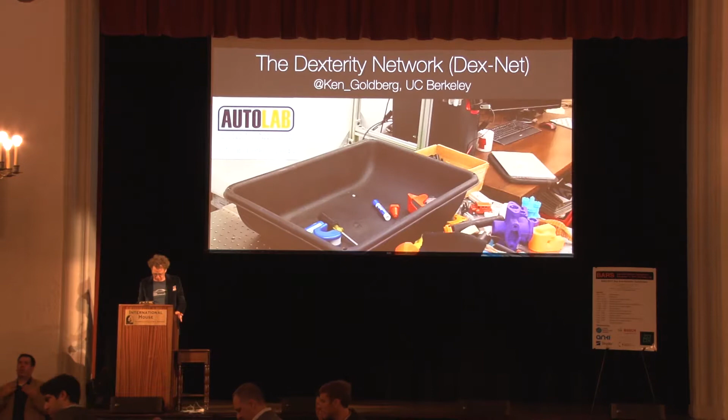This is the issue I've been thinking about lately, which is e-commerce. This has really taken off in the last couple of years. We now have an unprecedented amount of packages being delivered. I think Amazon's up to 500 per second.

The challenge is, how do you actually get these objects delivered? If you look at a typical Amazon warehouse, it's kind of like a hoarder's worst nightmare. They don't organize things nicely by category. They just throw everything into the next available slot, and then they have this challenge: somebody puts in an order for a box of Alka-Seltzer and a copy of Plato's Republic, and you have to somehow figure out where these two things are, put them together, and get them out the door. Right now it takes about a day or two.

What they'd really like to do is get this down, and the faster they can make it, they believe, if they can get it down to even a matter of hours, then the demand will go up. So this problem is just going to exaggerate over the next couple of years. This is the particular area I think we can make some progress in, which is the picking and the packing.

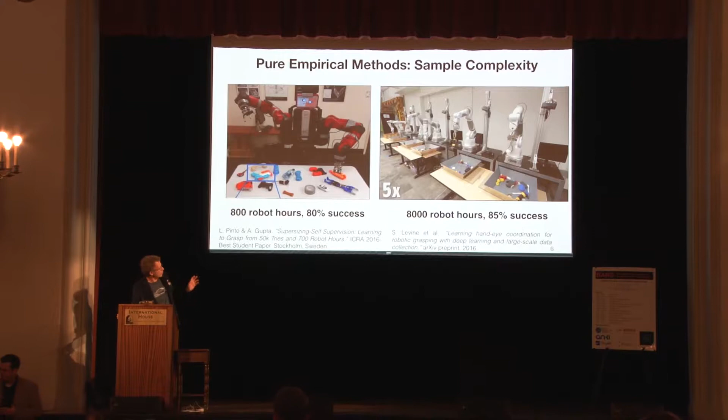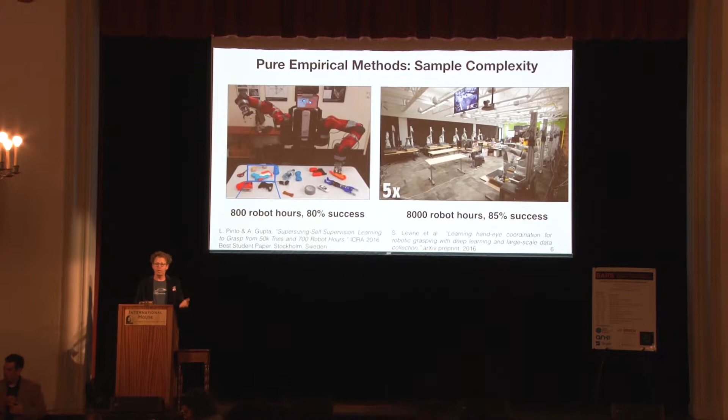We have seen some very exciting developments in what I would call purely empirical methods that take an ab initio approach. They just essentially sample lots of grasps and then do a form of reinforcement learning over time, and you're getting very interesting results. But the thing to notice here is the asymptote. It seems that as we increase the numbers, the sample complexity is of a concern, because we want to be able to get up to 90, 95, 99%, 99.9% for industry to accept this, to adopt it.

Now, one thing we all know is that we've had this huge success in computer vision as a result of ImageNet. ImageNet was basically the collection of millions, tens of millions of labeled images, and that enabled, once you got to a critical mass, some scaling effects to occur. We started being able to learn structure that was inherent to the images and generalize beyond the training set.

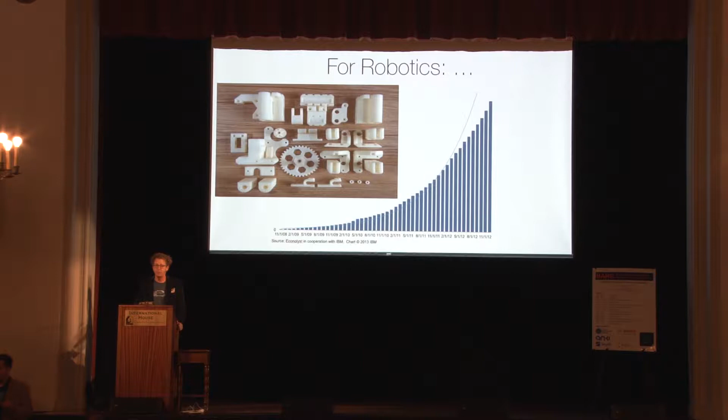So I'm curious if we could do something like that for robotics. In other words, can we also generate a labeled data set? For robotics, what we want is three-dimensional models, and the labels in this case would be grasp configurations for these three-dimensional models. The nice thing is that today, because of 3D printing, we have a proliferation of 3D models available. So I think this is achievable.

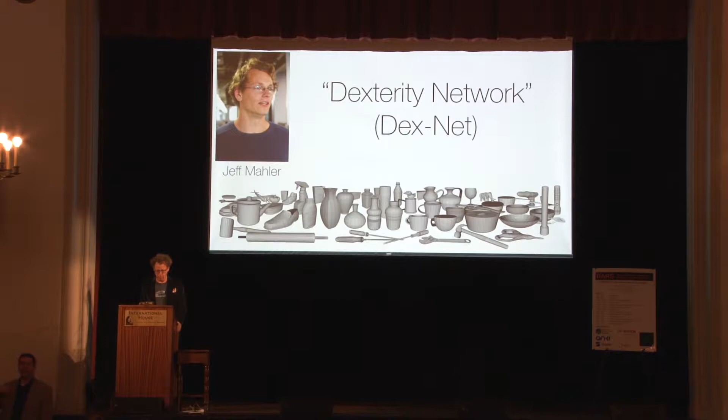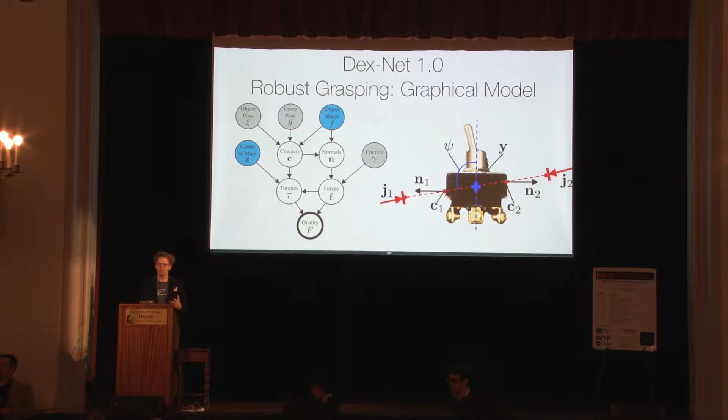This is really the thought behind what we call the Dexterity Network, and I want to give full credit to Jeff Mahler—this is his PhD thesis. Now a number of other PhD students are involved in it. The first version of Dex-Net was in collaboration with Google. We basically set up a graphical model to characterize all the sources of uncertainty, and there are many, because you can't sense things precisely, you can't control things precisely, and there's inherent uncertainty in the shape and properties like friction.

So what we do is this: we take an object, say this red object here, and we're going to consider many different grasps of that object. For each grasp, we're going to consider perturbations, because we want to be robust—we're looking for grasps that are robust to these inherent uncertainties. So what we're doing there is tweaking, moving the object.

We're sampling from the distributions to estimate and evaluate each of the perturbed grasps, which allows us to find grasps that are better than others. You can see the grasp on the right is more robust than the grasp on the left, and we can formalize that using Monte Carlo integration.

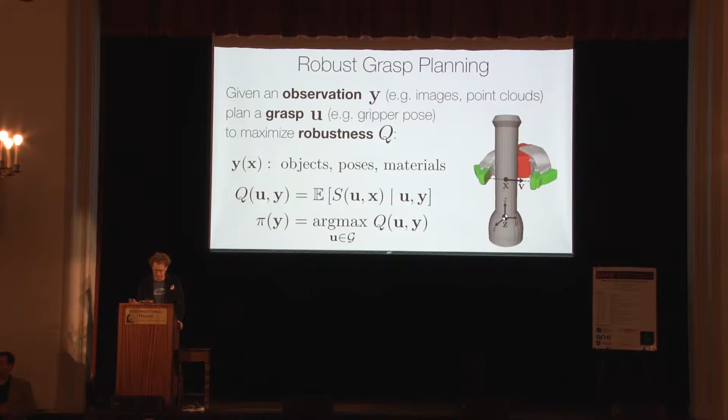We're sampling from these distributions to estimate a quality measure, which is the expected probability of success. We want to optimize that and find the grasp that maximizes the probability of success.

There's some combinatorics to pulling this off, because you have to do this for every grasp on the object, with about 1,000 perturbations per grasp, and for maybe 10,000 objects in your data set, this becomes a fairly daunting computation.

So some things we can do: we can make use of the cloud, working with Google's cloud clusters. We also leverage similarity—once we've computed estimates for one object, we can transfer that to other objects using multi-arm bandits, which has come up several times today.

We need a similarity measure, and this is where deep learning comes in, because we can use multi-view convolutional neural nets to find similar objects for a new object we encounter. Then we use a continuous correlated beta process to model the probability of grasp success, using the success of similar objects as priors.

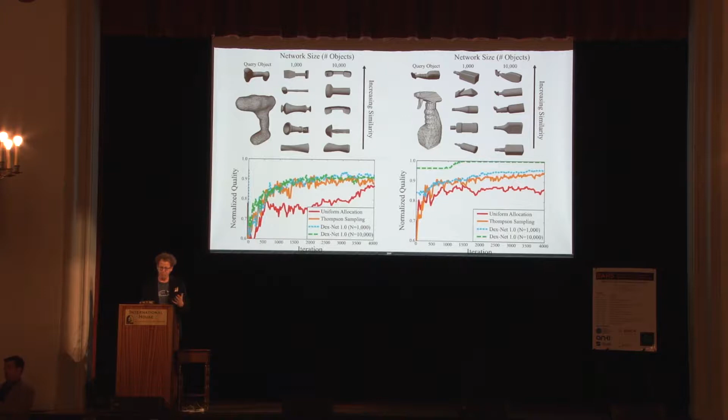We've been able to verify that this does work, and we get scaling effects as we grow the size of the data set. So this is the idea: we want to grow this set, this dexterity network, and have all these objects linked by how similar they are.

We're also very interested in adversarial objects. So we've been seeking adversarial objects, just as computer vision has been looking at adversarial images, and we're downloading these images and objects and then 3D printing them for experiments.

Now, we ran some experiments. They look like this, and here's the result: we got about 83% success. This is after we've trained it—using this technique, we've done all this stochastic optimization and got to about 83%. That's not very good, and it's because of uncertainty in the sensing and the control.

So this is what we call DexNet 1.0. Here's the block diagram of this system. Now, Jeff's idea was to remove two components, to go directly from point clouds to grasps. This is a pretty big stretch—I actually have to say, I was not convinced this was going to work.

But here's the idea: we render point clouds synthetically with noise, and as ground truth we use DexNet 1.0, because we know the probability of success for those grasps. Then we have a very large data set of grasps to use—in this case, about 7 million grasp examples.

We feed that in to train a convolutional neural network to estimate, from a point cloud and a particular grasp, what the robustness of that grasp is. We use that to find robust grasps directly from point clouds, and this has been working much better—we're getting up to 94% success.

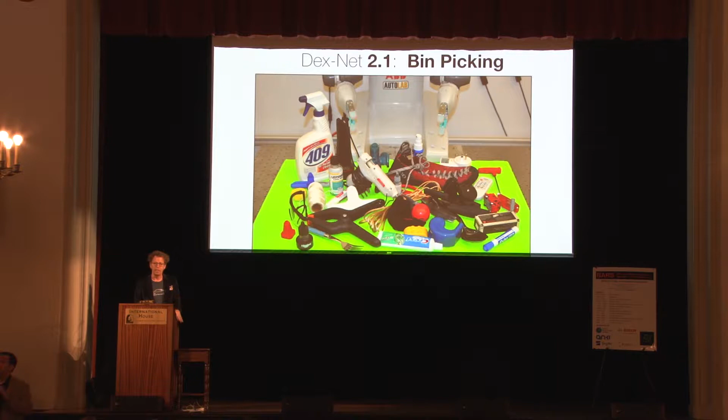Again, this isn't empirical learning—there's no reinforcement learning, it's doing this directly from analysis. Now, up to this point, everything was with objects in isolation. So during the spring, we started looking at objects in clutter, in bins, essentially.

Now we take this idea a step further: we actually sample synthetic heaps of objects. We use PyBullet to simulate dropping parts down, then generate point clouds from those. We again have ground truth from DexNet 2.0, and use that to come up with a training set for what we call DexNet 2.1.

Here the success rate is 89%. Again, not where we want it to be, but it's showing promise that we're able to routinely clear bins of 10 or 15 objects with this system. The nice thing about grasping, by the way, is that if you fail, you just get to retry, which isn't necessarily the case in autonomous driving.

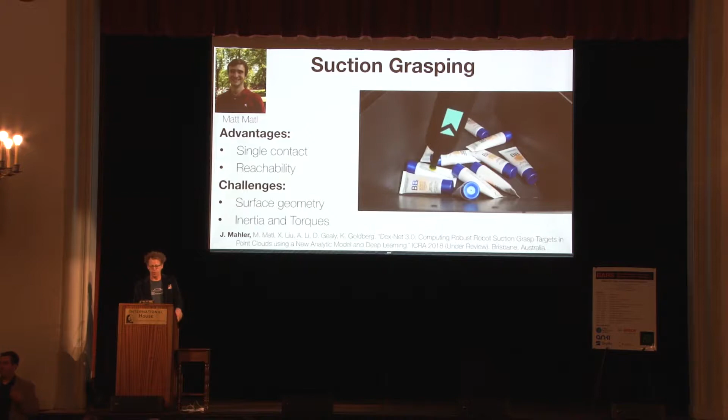So this is where we are, this is the plot. Now, the last thing I want to mention is what we're working on right now, and I'm very excited about it. You'll hear there's a poster today - Matt Matl is focusing on this, which is suction grasping.

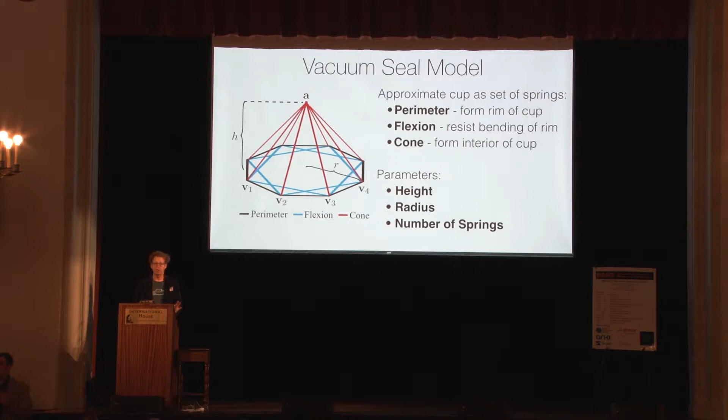Many people in industry use suction cups, so we want to apply the same methodology to suction grasping. We can generate a graphical model, come up with a seal model for the suction cup, and check if a suction cup seal will be good for a given target location. We can also do a wrench space analysis based on forces and torques.

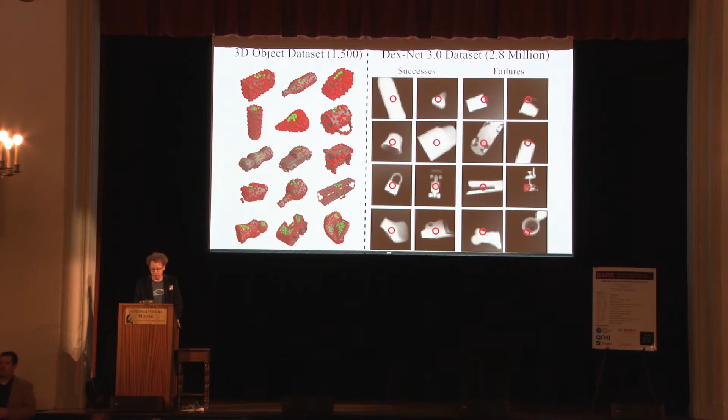Then we can generate robust grasps, very analogous to what we did before, and build this data set. We can do experiments - we're getting 81% on the adversarial objects, but on the typical, what we call basic objects down here on the lower right, we're getting 98% success. So we're very excited about this.

The next thing we're going to do is start looking at combinations, or working with companies on what we call composite policies, where we're putting together both suction and grasping. That will be our work in the next few years, or the next few months.

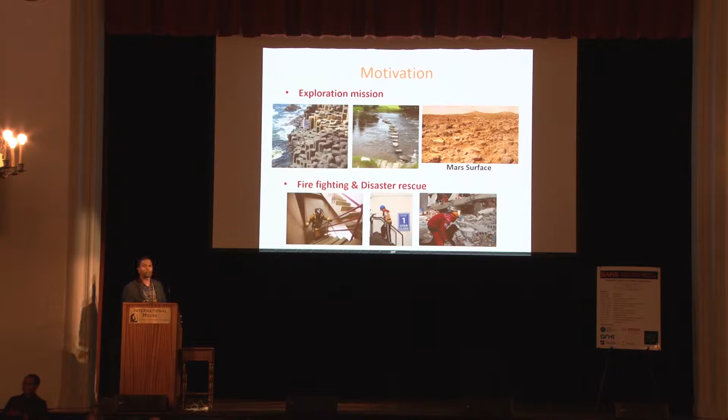Just to give you some motivation, every single scenario that you see that cannot be navigated by wheeled robots, legged robots can navigate. People are motivated to work on legged robots because of this, but we don't have the control approaches to navigate this terrain. I'm going to show you one control approach towards this.

So here's a kid doing the stepping stone problem. Now, I'm not evil - the kid actually nails the stepping stone on the last step. What he fails to account for are the contact forces, so he fails, he slips, and he falls.

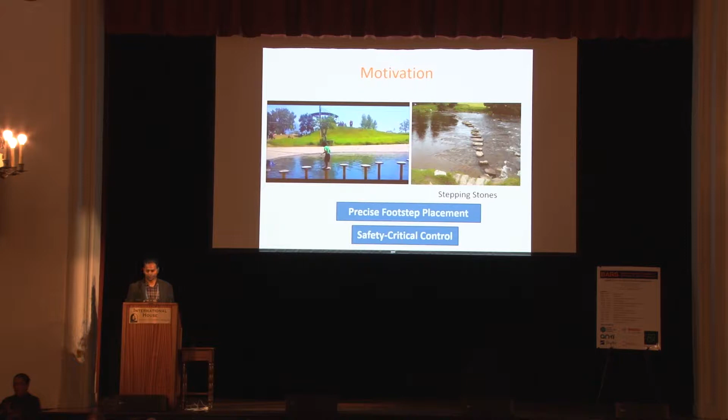So if you want to design controllers, you not only have to take the constraints of the stepping stones into account, but you also have to take the friction constraints into account. If you do things right, this is what you get. So I'm going to talk about the control approaches behind this.

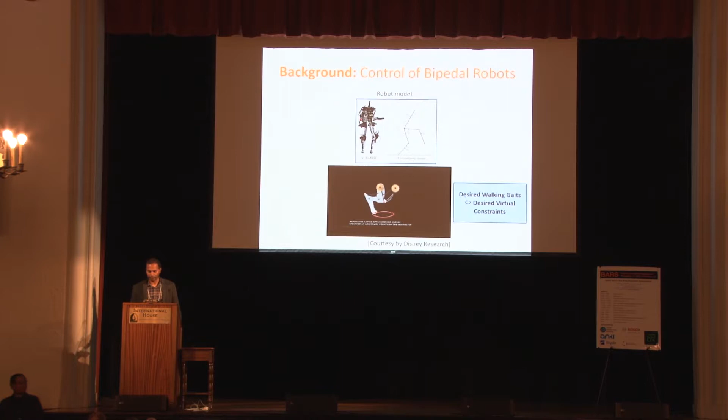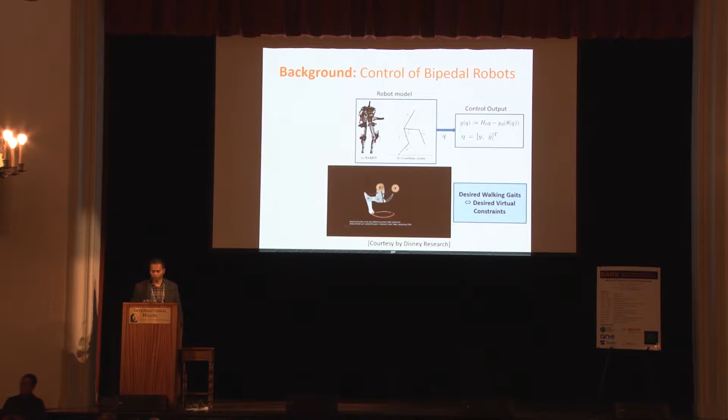Just to give you a quick background: for legged locomotion, you have a set of flat outputs - a set of outputs that you want to drive to zero. So you design a controller to drive Y to 0. One way to do this is to do input-output linearization.

So you create an exact linear system using feedback linearization, and then you can do your favorite controller on this linear system. This could be as simple as PD. But once you realize that you can do PD, you can do something even more advanced.

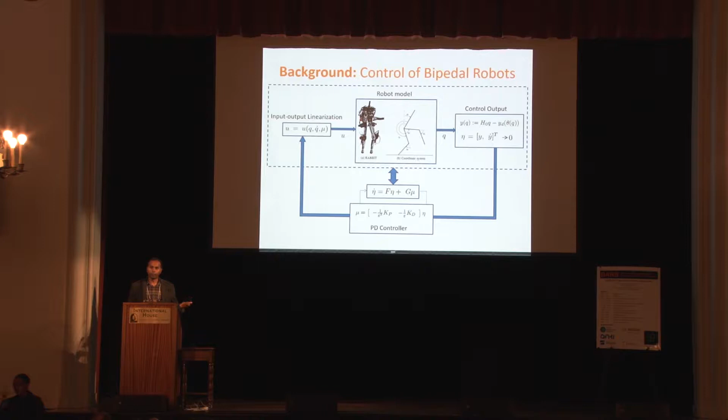Now, thanks to Slotine's talk, I can now talk about control Lyapunov functions. So instead of doing PD control, you can express a control Lyapunov function and enforce this constraint using the controller, so V dot depends on the control input. If you do this, your outputs go down to 0 exponentially.

This can be expressed as a single quadratic program that's solved pointwise in time, and QPs are really quick to solve. Once you have a QP, you can incorporate constraints such as input constraints, torque constraints, friction constraints, and so on.

So let's move to the safety critical problem. You want to move your swing foot and land on this - you make a single mistake, your whole system fails. This is sort of like autonomous driving without the lane markers and so on.

So the key here is control barrier functions, and it's very similar to control Lyapunov functions. You want to enforce the constraint of B being always greater than 0. Instead of enforcing this constraint directly, you look at the time derivative of B, which depends on the control input, and you enforce this constraint.

It's very similar to the CLF constraint. If you do this, now your state evolves in this green region, which indirectly satisfies B greater than 0. So you put this together, you have a single quadratic program that can enforce stability, safety, and other constraints.

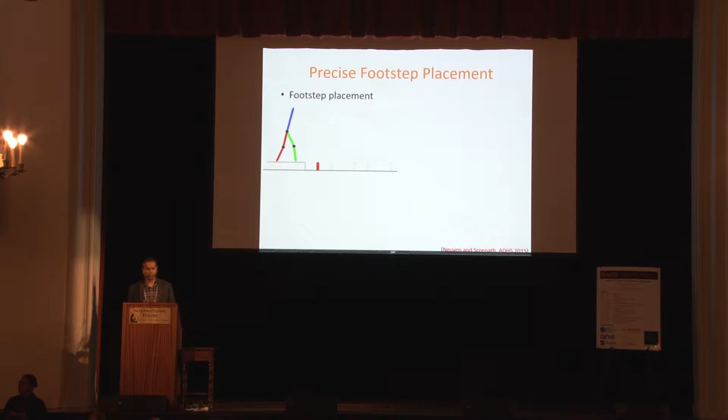The foot placement constraint can also be enforced through barriers. So you can construct a barrier such that your swing foot is inside this big circle and outside this little circle to guarantee your end time constraint.

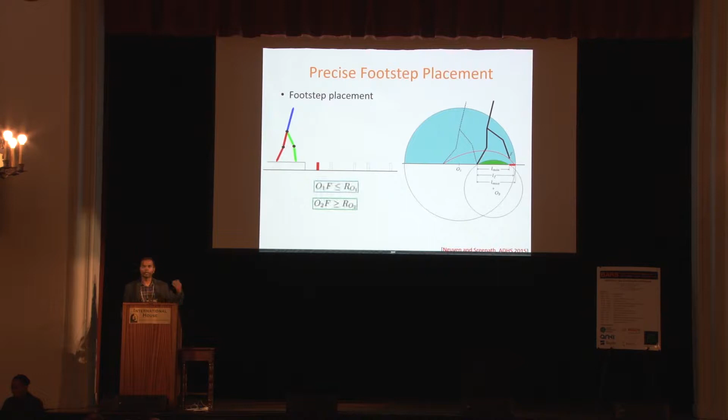Now here is a simulation. You have information of this terrain one step ahead. You don't have sufficient time to do planning on the fly, so your controller is moving your periodic orbit slightly so that you're guaranteed to have a foot contact on the next stepping stone. This is a simple model of Rabbit.

It can be applied to more complex systems. This is DURUS, 20 degrees of freedom. Here, not only the step length, but the step width also changes. You can also do step length and step height.

This is a model of ATRIAS. So this is really complex terrain. We have knowledge of the terrain only one step ahead, so you don't have the entire terrain. So you can do worst case where the step length and the step height changes, and all of these nice, interesting animations.

But everything works in animation and simulations, but here's an experiment. This is ATRIAS walking on cinder blocks where the step lengths are stochastically changing. Now some graduate student has measured all these stepping stones accurately and is giving that information to the controller one step ahead. But also the robot places its foot at some particular point, and so it has to do some dead reckoning based on onboard sensors to correct for this.

So here's where you have step height and step length changes. There was a recent video that came out from Boston Dynamics a couple of days ago. If you've seen that, they're doing stepping stones. This is our first approach for walking on stepping stones.

Now, if you want to use perception, this is what the robot sees. You cannot really see where you're stepping. You can only see a couple of steps ahead. So we're trying to put a camera on this. Some preliminary approaches towards this: simple depth segmentation can get you walking on the stepping stones.

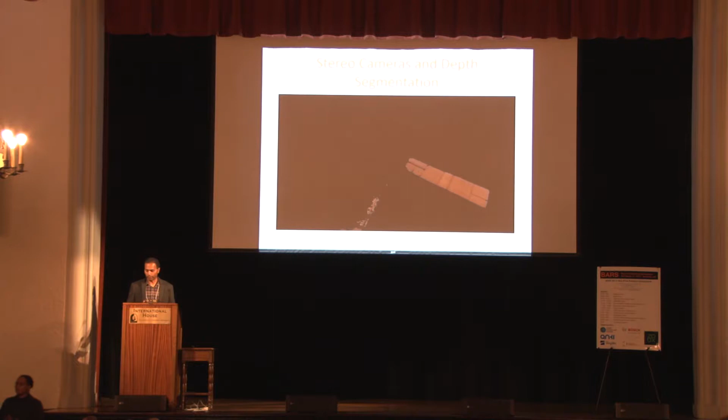But now we want to move away. We want to look at deep learning. Everybody looks at deep learning. I don't know why, so we're looking into it as well.

Sorry, Peter. Sorry, Sergey. OK, so what we're looking at here is a safety critical control. We want to put in a perception from deep learning that also does safety critical perception. Now, the controller could enforce safety critical constraints, but if your perception gives you the wrong estimate, your controller will go for that wrong estimate, and your system will fail. So you have to have both safety critical control as well as perception.

So towards this, we have some initial results. We have a sampled image. We take one image at the start of each step, and we use deep learning to estimate what is the input to the safety critical control. And you close the loop, and you can achieve walking with the safety critical perception. So we still haven't solved the entire problem, so we're looking into solutions to this.

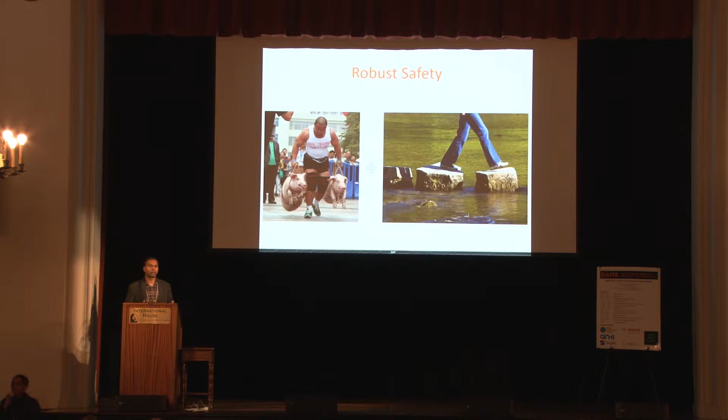So we're also looking into the problem of where you have robustness to model uncertainty. So you want to do safety control with unknown models.

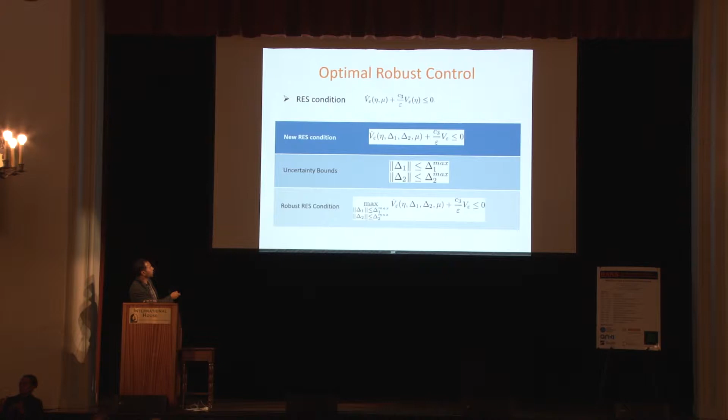Lots of math here. So we're trying to enforce this Lyapunov constraint. With model uncertainty, you have these unknown parameters. If you make an assumption that they're bounded, then you can do a max constraint. So this becomes a min-max constraint. And then you can achieve robust safety critical control where you have dynamically moving stepping stones.

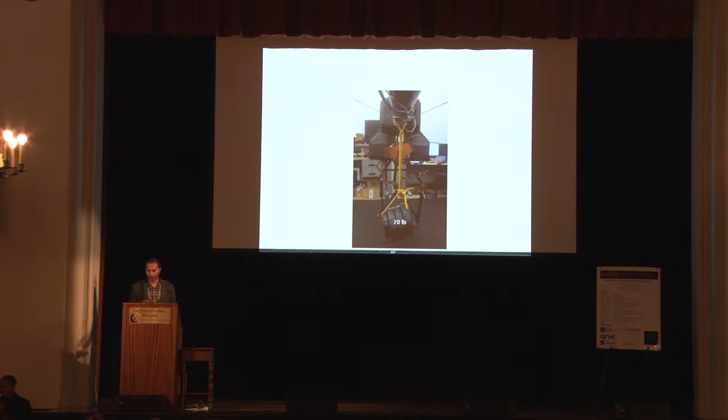So this is sort of Indiana Jones walking the Temple of Doom, carrying something heavy. We're doing some experiments towards this. This is about 70 pounds added mass. The robot weighs about 140, so it's almost 50% extra mass that the controller doesn't know. This is only standing, so we still have to do walking.

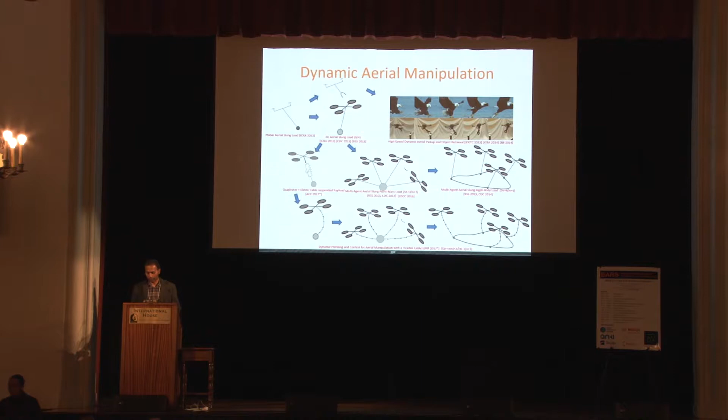So we have a bunch of things, let me quickly wrap up. So this is controllers on high dimensional systems. You have 12 degrees of under actuation.

Most of your robots that you work on usually are actuated, so this is a high degree of under actuation. This can also handle a huge uncertainty where the quadrotor is inverted, the load is inverted, and your controller can still guarantee convergence to this desired trajectory.

So to wrap up, I've presented a little bit about robust agility and safety for legged locomotion, and briefly hinted on the work that we do in aerial manipulation. So thanks for listening, good to be part of this.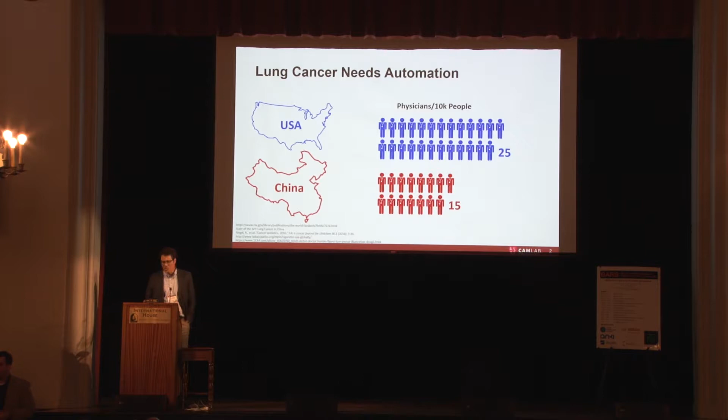The advance made in this paper was that they were able to achieve a real-time registration, which is important for doing this intraoperatively. The way they did that is by not needing to render many of the virtual CT images in real time, since that's computationally intensive. Instead, what they did is warp the actual camera image.

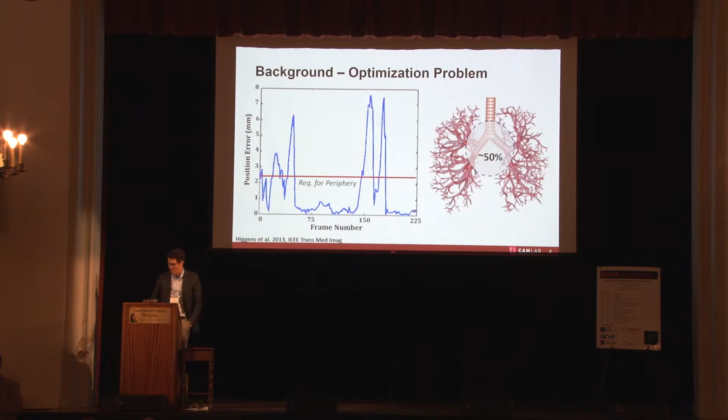So like everybody else in the audience, it looked like we've had to turn to deep learning, and I'm probably the least well-suited person to do this, but we've had no choice. And so the way that this works is as follows, pretty straightforward.

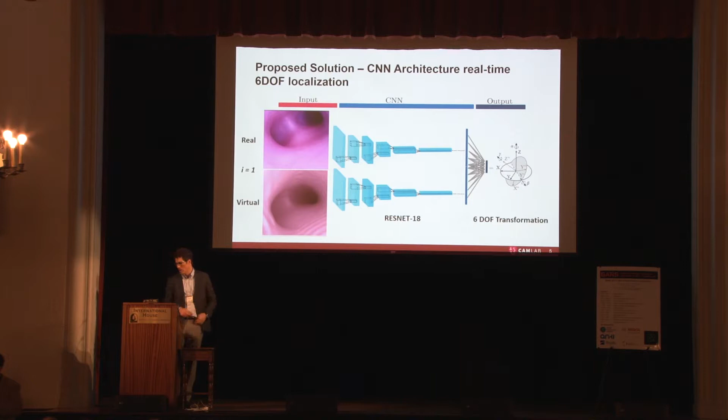Now we need to run this iteratively to achieve real-time registration, and so this is what it might look like at the first time step, and then as I tab forward to the next time step, what you would do is register and adjust your virtual image to match your real image. As I go back and forth a couple of times here, you can see that after you do this registration, your real image will then move again, and you continue to iteratively run this process. The idea is it should keep you registered as you move along deeper and deeper into the lung.

So how do we train this neural net? We can run a video of the simplest thing you can do, which is to pick a centerline path. We want to use the virtual images that will tell you the transformation between 2 different views. So if you run a centerline path, you can get a bunch of different views that would look like an actual bronchoscope path down the center. But of course, you don't know exactly what path the user might take.

So we introduce, let's see, this is not it. Let's see if I can get to the next. There we go. So please don't get sick. This is, of course, sampling from a bunch of different positions and orientations along the path in order to explore potential images that you might see in real bronchoscopy, so that you can then take those image pairs and register it.

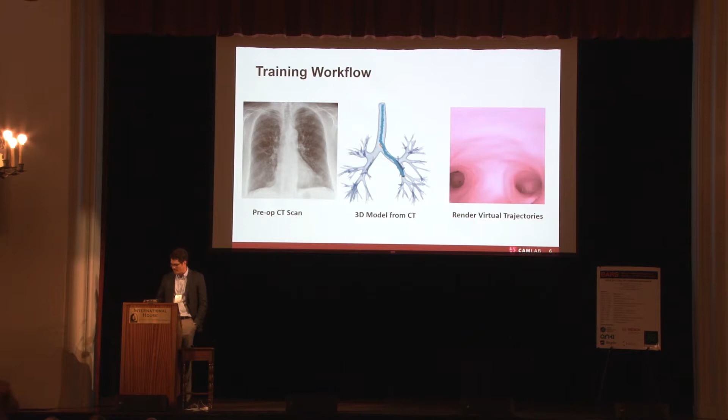At any given point within the lung, we're stepping through this at about 500 microns. We're sampling every 500 microns along the length of the lung, because we believe that will basically be a smaller resolution given the frame rate of the camera, about 30 hertz, so we'll be sampling sufficiently here. At each time point, we generate about 20 virtual images, and then we try to introduce some noise to show the types of variability that you might see in an actual bronchoscopic image. These are 20 images from a single point in space, and essentially what we're doing here is changing the light intensity, changing the smoothing, and also introducing obstruction.

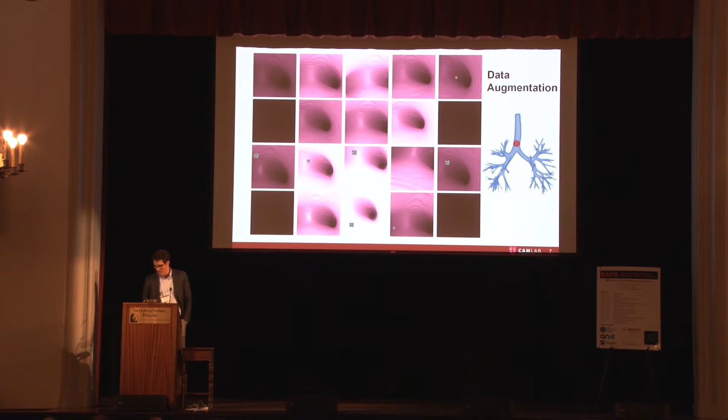These preliminary results show that we can get errors under 2 millimeters, which would allow us to explore the full lung. But as I said, this is just simulation. We are cheating to some extent because this is the distribution we sampled from for training, so we were only training with a few millimeters of error between images. If we go to 4, 5, 6 millimeters between images, which we don't think is that likely, the error would be much higher. So we still have to prove this out in real images.

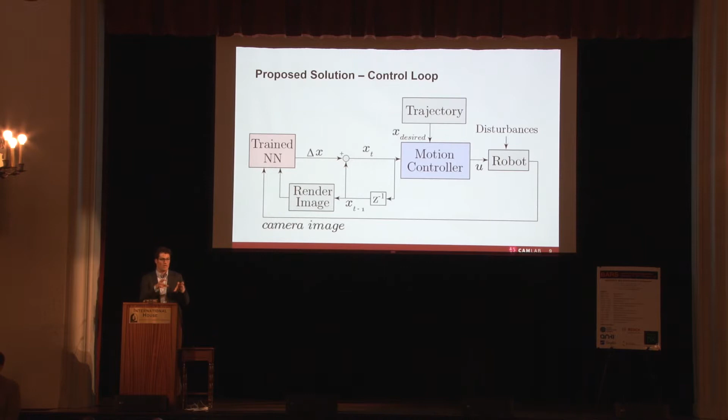The idea is to use this as a feedback control mechanism, ultimately for automated surgery, and the neural net will now essentially serve as our sensor. A camera image comes back out of the robot, it's compared with the virtual rendered CT, and you get a transformation between the two. You add that to your prior time step and feed that into a motion controller so you can follow your desired trajectory.

It appears that I am out of time, so what I'll do is just let this video run of a simulation of closed-loop control, and also acknowledge my students who are the real learning experts here, Jake and David, who've done some excellent work on this project. Thank you very much.

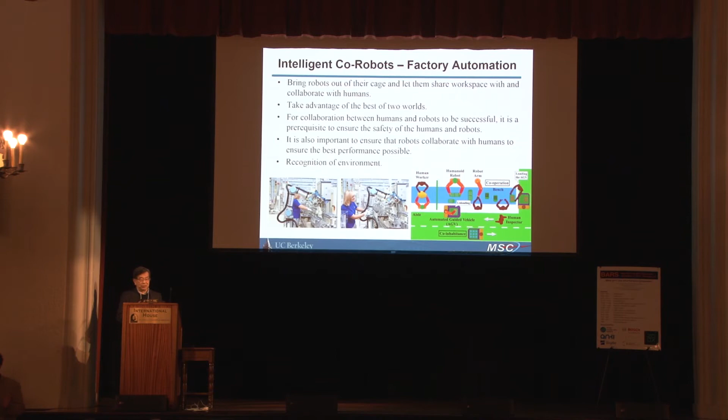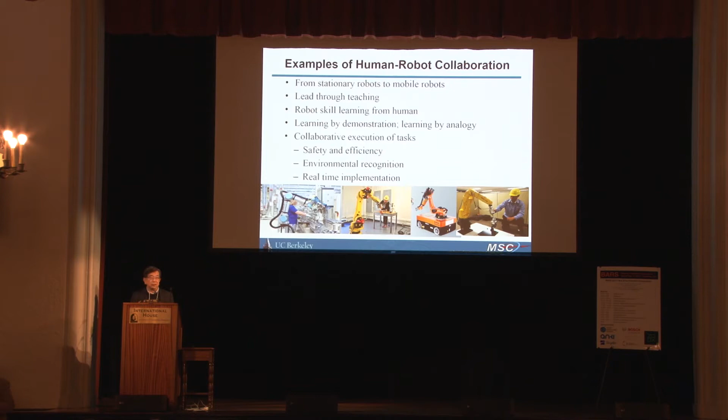As part of the research, to ensure those two things, robots should be able to recognize the environment. There are lots of interesting things going on, and we are looking at robots from stationary robot to mobile robot. Some examples of human-robot collaboration: our early work looked into lead-through teaching and robot skill learning from humans, learning by demonstration, or more recently learning by analogy, and also collaborative execution of tasks, emphasizing safety, efficiency, environmental recognition, and of course real-time implementation.

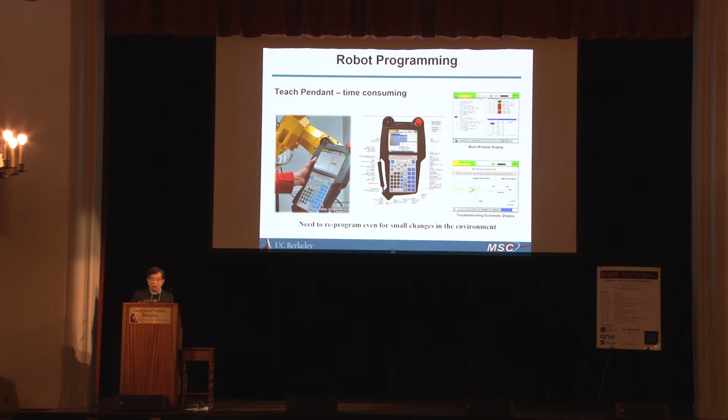The first example, robot programming: the very traditional way to program a robot is to use a teach pendant. But this teach pendant, if you talk with factory people or industry people, is a very time-consuming part. You would like to be freed from this kind of robot programming because it takes a long time, and if the line changes, you have to reprogram again. So we started looking at lead-through teaching.

This has also been done in the robotics industry for some years. It's a very intuitive method, but it works well. So the human worker grabs the robot end effector directly and guides the robot along either the trajectory he wants or to the goal we want. And while doing that, the robot learns how it was done. Then if a similar situation happens, the robot can execute it by itself.

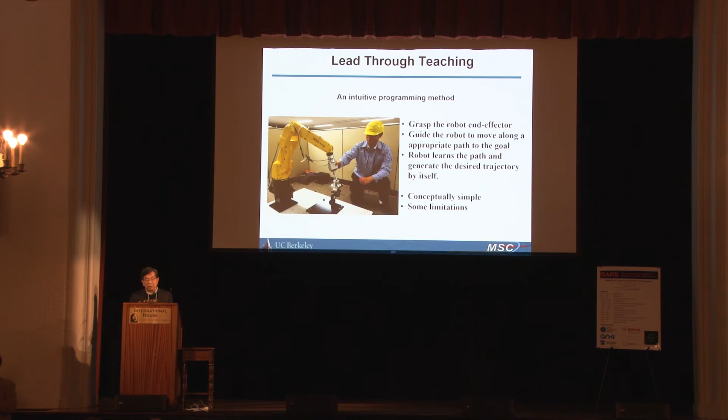It's simple, but there are several problems and limitations. One, of course, comes from safety - you cannot give too high bandwidth control to this type of loop. Essentially, in doing that, we are relying on force feedback. But if the bandwidth of the loop is too large, it may not be so safe.

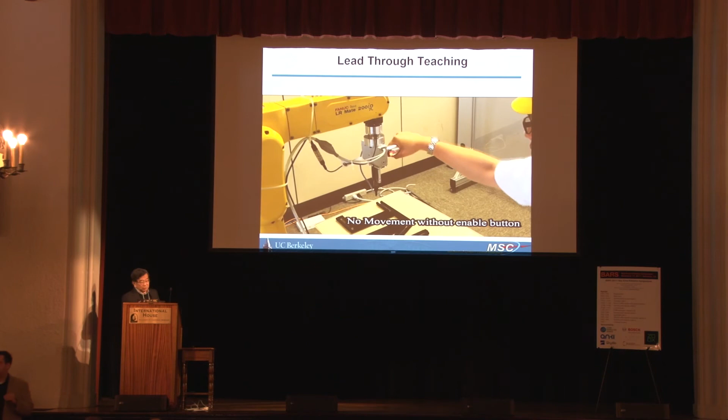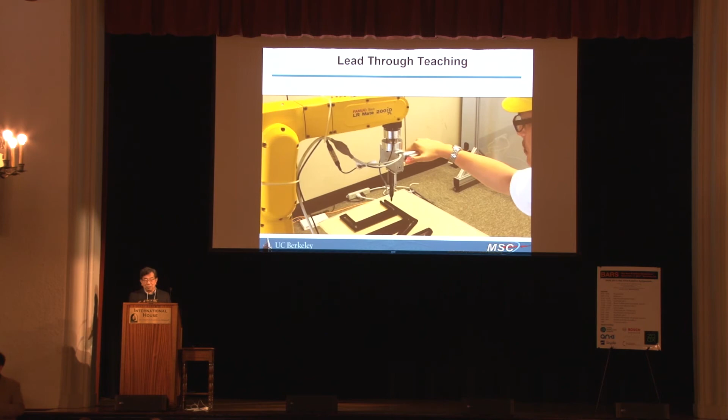There is a movie I would like to show. For teaching this kind of thing, the teaching pendant may take 28 minutes, but with lead-through teaching, it can be accomplished in a few seconds. We also designed some mechanisms to make sure the robot doesn't become unstable by itself.

Okay, one limitation is due to limited bandwidth. If you have an insertion job, a peg in the hole insertion, you cannot bring the robot or peg very parallel to the hole. You can bring it approximately, and from that point on, you have to do some other operation. How do you align the peg and hole and so forth?

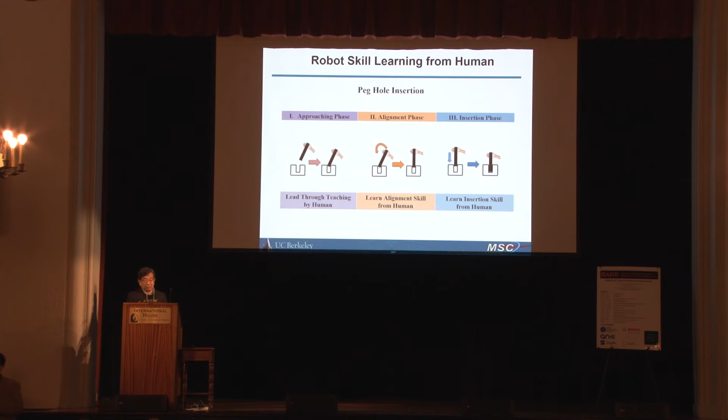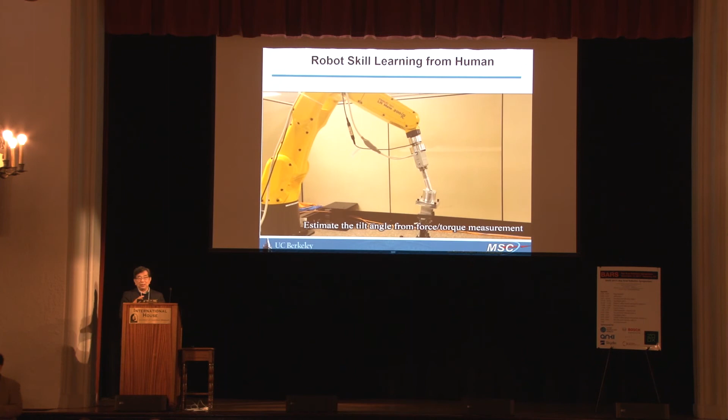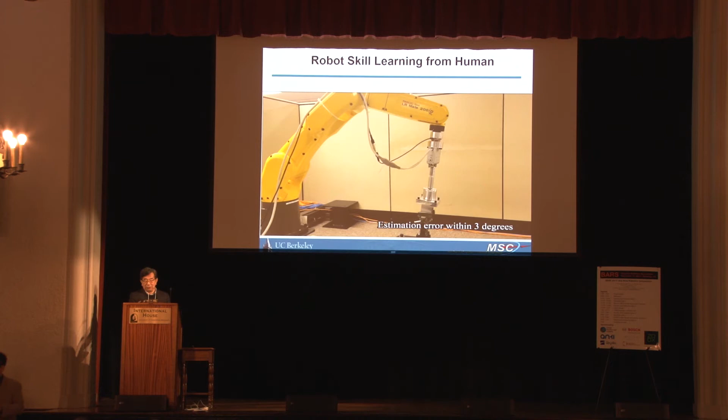For this, we've also looked into the human way of doing it. For example, what a human does is bring it parallel. He might even close his eyes, look for the hole, and once he comes close, make it parallel and do insertion. In doing that, a key relationship is once the peg makes 3-point contact, you can predict the force sensor output and the angle. If we use that information and automate, the robot can do peg hole insertion based on that information. By doing that, we achieve very reasonable results.

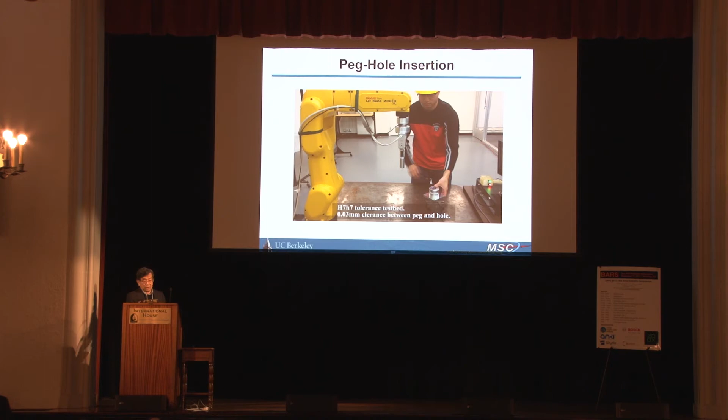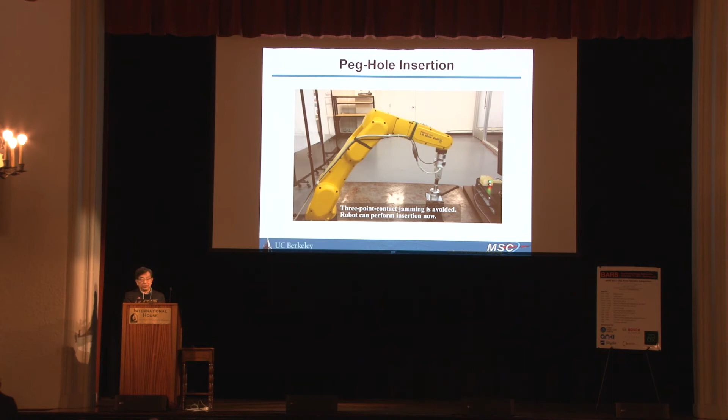Okay, so this is again a video showing both the lead-through teaching part and peg hole insertion. You bring it, make 3-point contact, and then based on force sensor output, we link it to the hole and align the peg and do insertion. And of course, if you have a new workpiece, you don't have to do the first part every time because the robot has already learned.

Now, more recently, the student in the movie was Te Tang, and more recently he's been looking at learning by analogy. Here the intent is when you teach, you try to minimize the number of things you have to teach, and based on a very limited set of knowledge, the robot can automate a variety of things.

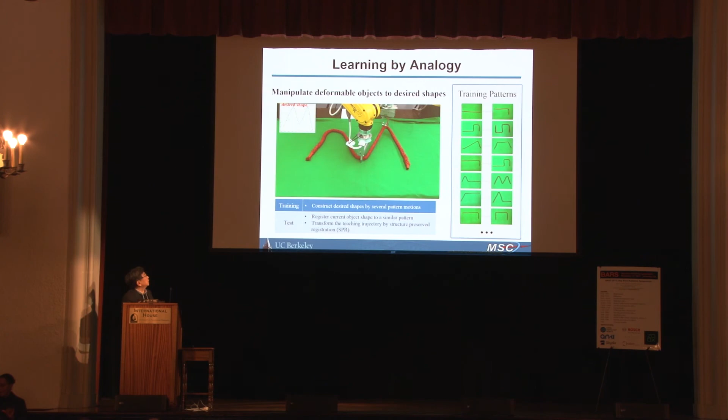So this is, for example, one case where you've taught the robot this type of basic pattern on the right, and based on that, if a desired shape is given, the robot goes to a database and figures out how he can make that shape. It doesn't have to be a shape stored in the pattern, and in this particular case, most of the shape appears to be in the remembered memory.

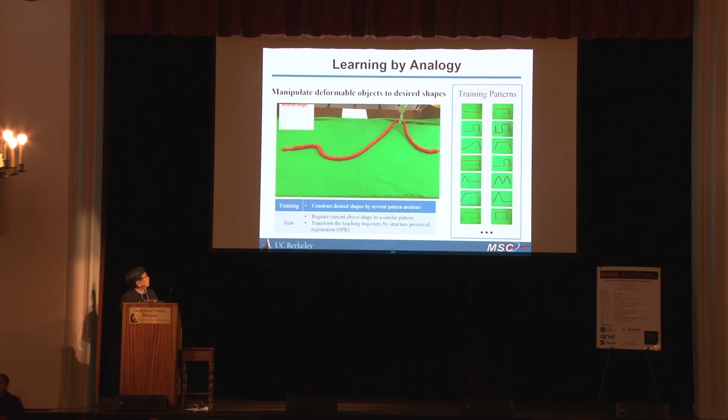And also, the rope may be placed very randomly at the beginning, so look, we can do this kind of thing. Also looks a little bit like what Ken was showing.

He's trying to say that we teach the shape, the training shape number is minimized, and based on analogy, that knowledge can be applied to test objects of similar things.

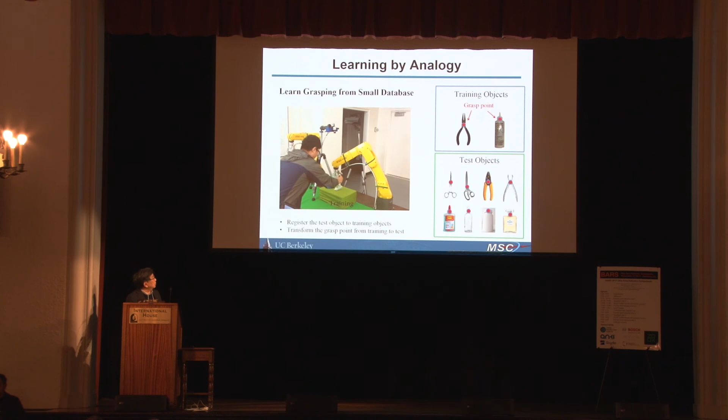And this is from some certain cases. This is through the training part for this bench, a plier he learned, but once it learns, it can pick up similar looking objects. And this is for some bottle, and he's teaching it to grab the neck part, then it doesn't have to be exactly the same.

Then finally, for human and robot sharing the workspace, this kind of scenario, we would like to have both safety and efficiency. So this is Changliu Liu's work, and we have parallel optimization paths, one for addressing the efficiency, how we can do efficient operation.

This is more long-term planning. And then looking more into current measurement information, we make it safety, and that's the short-term optimization part. So the parallel structure will accomplish both, and we do it in real time.

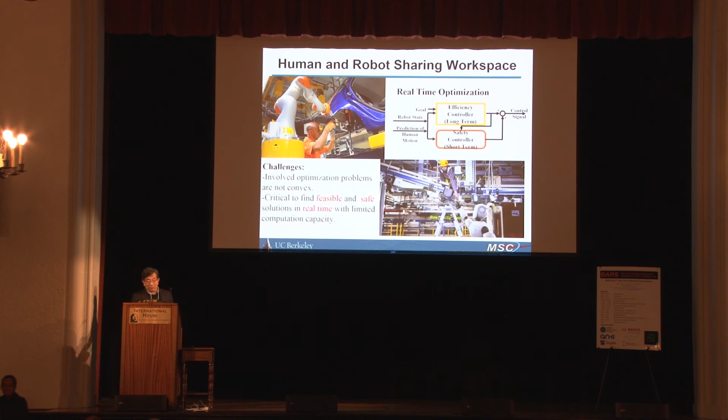So for doing this, we have to have a very nice, efficient, feasible optimization algorithm. One algorithm Changliu Liu came up with is the convex feasible set, or convex optimization algorithm. The original problem is not necessarily convex, but it approximates a series of convex optimizations to accomplish it. This approach is very efficient compared to other approaches, this is CFS versus other approaches.

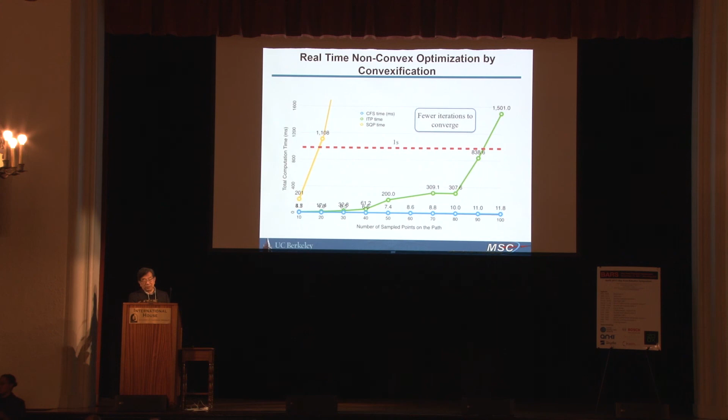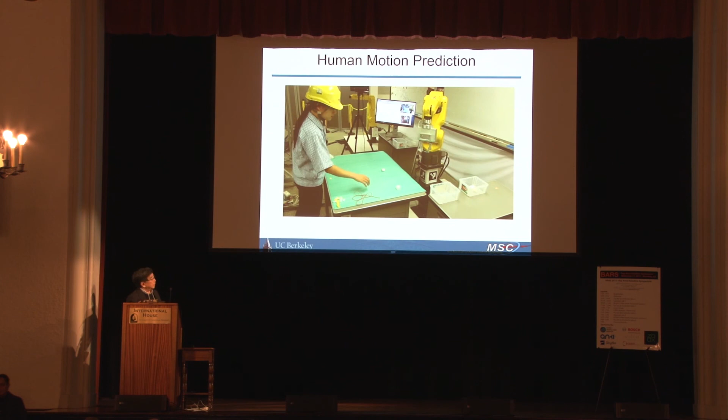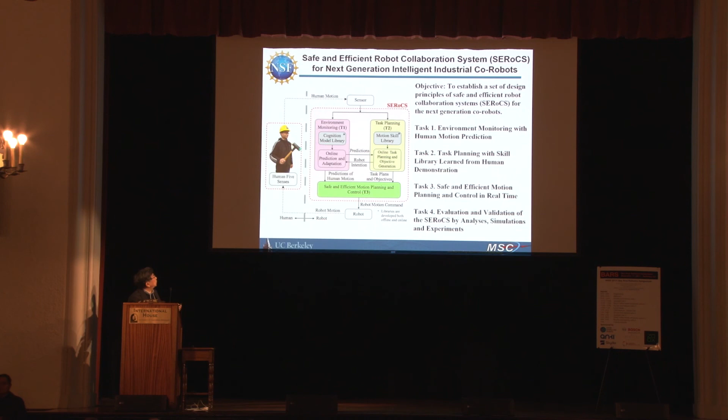And for the T1 part, environmental monitoring, I'm just showing one last video. Okay, this is human, looking into interacting with the robot. The robot knows what kind of assembly operation she wants to do, so there is some flow, okay.